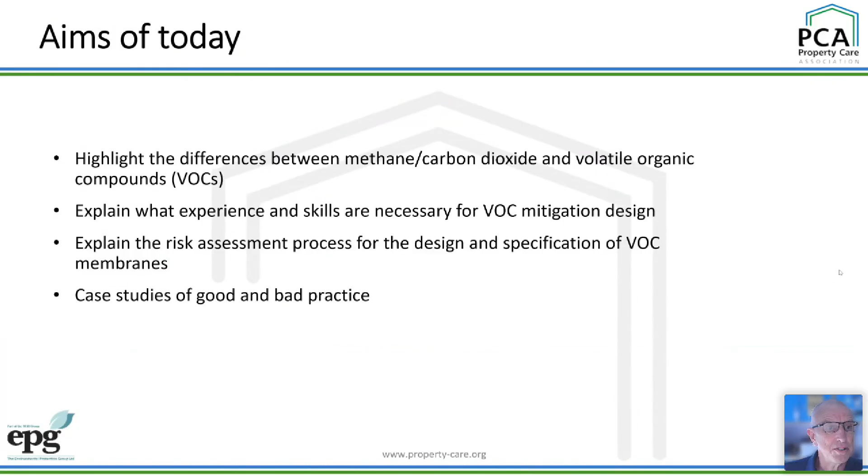So a few years ago, there was Dave Cook's blog on the PCA website, and the inimitable Mr. Cook, when it comes to VOCs, what he was saying is correct. You need to know your limitations, because they are different to methane and carbon dioxide, and they aren't simple things to deal with. Even qualified risk assessment professionals sometimes have difficulty doing VOC risk assessments, and I'll explain some of the reasons why that is during the presentation.

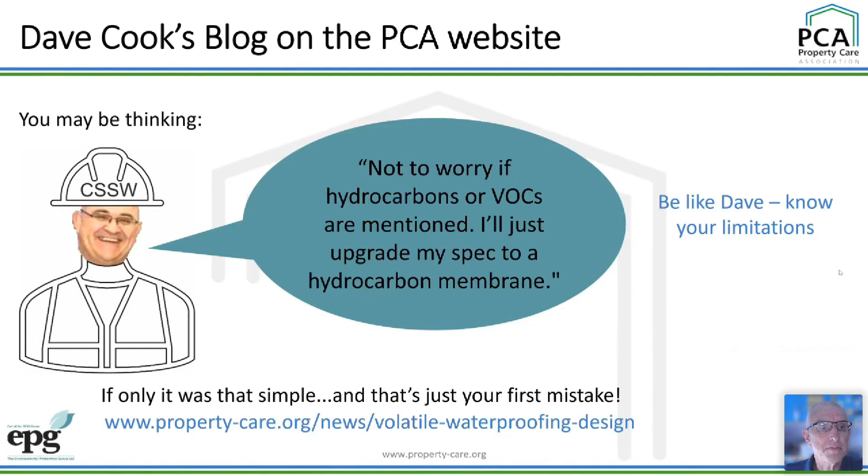So I do see a lack of competence in where waterproofing advisors are providing advice on VOC mitigation systems, and these are some statements that I've seen being made. So the membrane has been tested in line with the 9 standard challenge chemicals. What that's referring to is C748, and then on the basis of those test results, it's summarized as an excellent barrier, and that those 9 challenge chemicals are representative of the performance against all ground conditions with VOC contamination.

That answer just demonstrates poor understanding of VOC membranes and risk assessment. So there are over 10,000 VOCs, and we do not test or risk assess for all of them. Some of them don't even have limits that you can design against, because the toxicologists haven't done the necessary research.

The good thing is that the reviewer is asking for a risk assessment, but the answers are quite worrying, because nowhere in any of the guidance documents does it define or refer to an excellent barrier. And you can't do that, because VOC membranes are permeable to VOCs. They don't stop the flow completely.

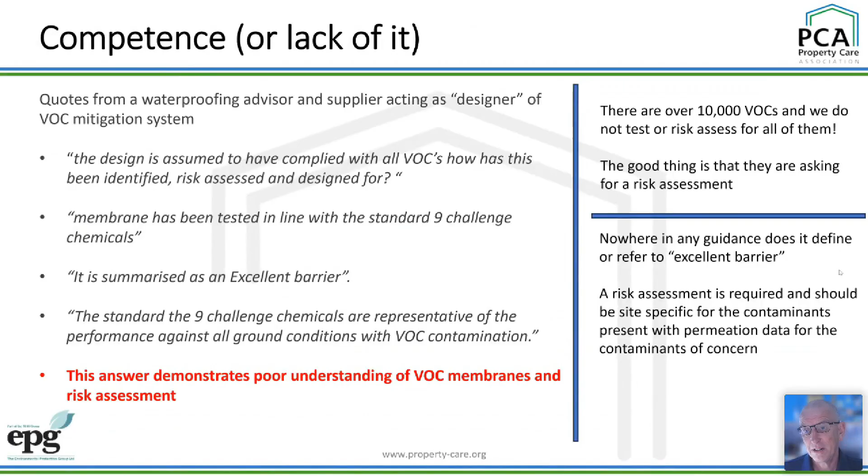So there are significant consequences where if you don't understand the VOC risk and you provide poor advice, then there are consequences. And the first of those is that it can cost clients a lot of money by specifying VOC membranes when they're not required.

But more importantly, people don't recognise high-risk situations and end up specifying inadequate protection that puts the health of occupiers at risk and results in costly remedial works. And that's not just across waterproofing professionals, it also extends into the contaminated land industry as well.

So you can see on the right-hand side there, we're coring through a concrete floor in an occupied building because VOCs are entering that building and building up at concentrations that are unacceptable, that are a hazard to health. And the mitigation design below that slab wasn't sufficient for the concentrations of hydrocarbons or VOCs that were in the ground. That cost, just the investigations to determine what the problem was and then determine a design solution, was expensive.

And then installing the design solution was expensive as well. So it cost the contractor a lot of money. We're talking tens of thousands of pounds to put that right.

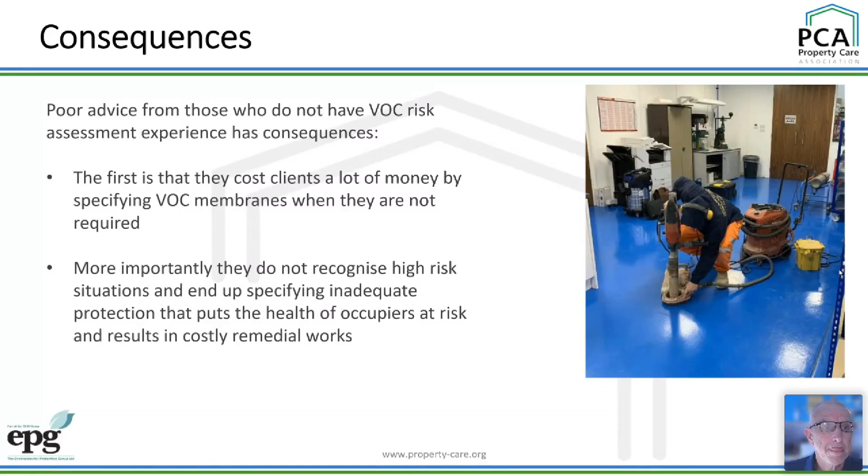So if we go back to the beginning, where do we find VOCs? They're in the ground below old industrial sites, below petrol stations, below dry cleaners, anywhere where petrol, diesel or oil has been stored, either below or above ground. Some of the more common ones are benzene and toluene, present in petrol and diesel, known as petroleum hydrocarbons.

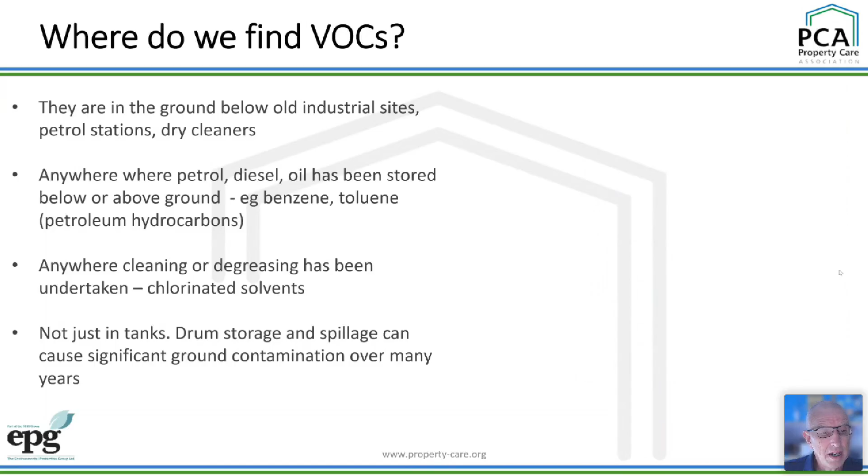But you can also find them anywhere cleaning or degreasing has been undertaken, where you'll commonly find chlorinated solvents. And it's not just in tanks - drum storage and spillage can cause significant ground contamination over many years. You'll quite often see areas like this, particularly in poorly managed older sites.

There was actually quite a famous case where spillage of a chlorinated solvent at a tannery site over the years, when they were transferring it from drums into other containers, had contaminated the groundwater in Cambridgeshire and resulted in quite a costly legal claim against the owners of the site.

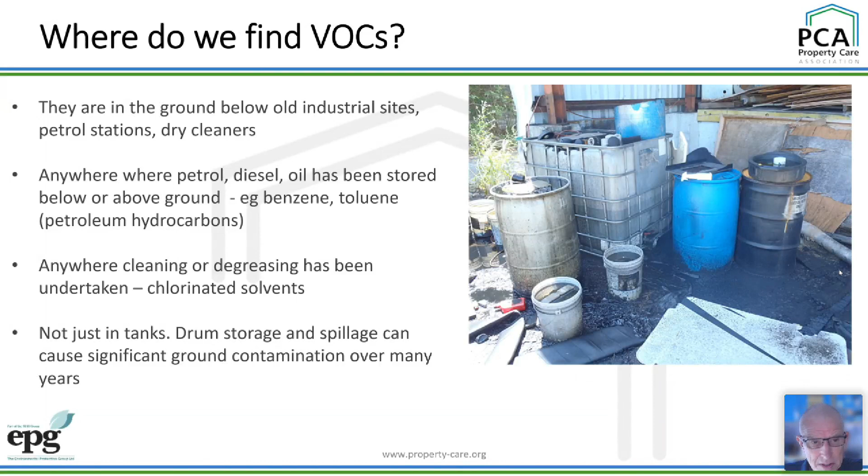So the difference in risk between methane/carbon dioxide and VOCs. On the left-hand side, we've got methane/carbon dioxide, and typically you have hundreds of thousands of milligrams per metre cubed as a source concentration. So methane and carbon dioxide are present in percentage concentrations in the ground.

The migration rate through a gas membrane is actually very low - it's 4 times 10 to the minus 4 milligrams per metre squared per hour. But the target concentration inside the building, even using a minimal risk value of 100 ppm methane, is still very high compared to the rate at which the gas can migrate through the membrane. So on the left-hand side, providing the membrane is installed correctly, it does effectively create a barrier to gas migration. But that's not the case on the right-hand side, where you've got hydrocarbons.

In this case, we have much lower source concentrations of vapour in the ground, but the permeation rate through the membrane is much, much higher. For example, toluene through HDPE has a typical permeation rate of 23,000 milligrams per metre squared per hour, which is high compared to the target concentration of tens of micrograms per metre cubed. A microgram is a part per billion.

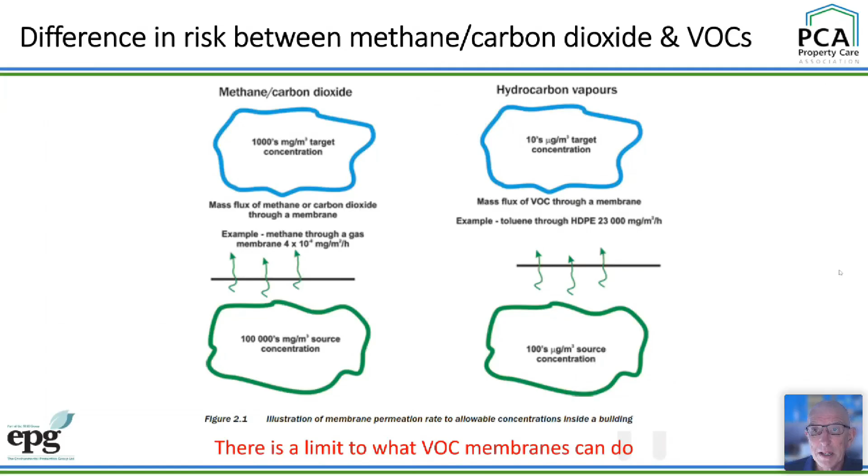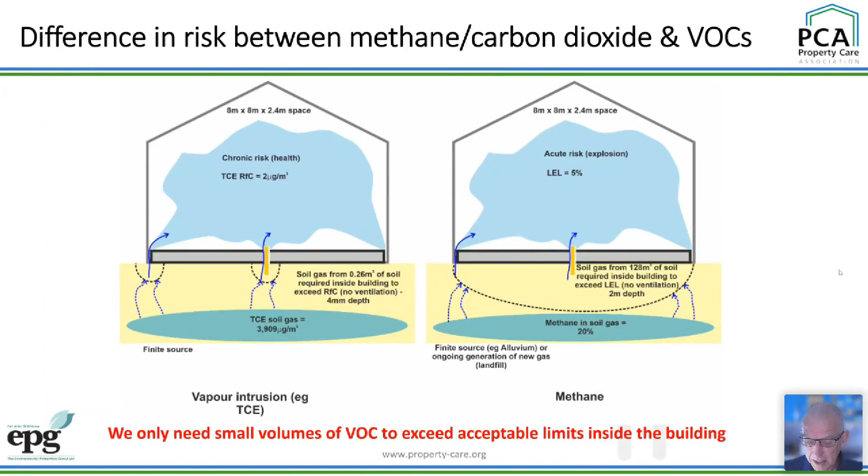The reference concentration, the allowable concentration inside the building, is 2 micrograms per meter cubed. If you've got a particularly dirty site with high soil vapor concentrations, you only need to suck the soil gas out from 0.26 meters cubed of soil, about 4 millimeters depth in that situation. I can't remember what radius I've allowed, but it's very, very small, so it's feasible, and it does happen. That is why VOCs are at much more of a risk than methane and carbon dioxide. You only need small volumes of VOCs to exceed the acceptable limits inside a building.

So, are all hydrocarbons VOCs? No. Hydrocarbons are compounds of hydrogen and carbon joined together, and one of the principal ones are the chief components of petroleum and natural gas. But VOCs are any organic chemical compound that can significantly vaporize under conditions of normal atmospheric temperature and pressure. So hydrocarbons, for example, include oil. And oil on its own is not a VOC. There might be VOCs within it, but it's predominantly heavy end hydrocarbons, which don't volatilize.

So in simple terms, that means it's compounds that are likely to change into gases. Compared to compounds like water, they evaporate with far greater ease, which means they can quickly contaminate indoor air. If they're present in water, they can diffuse through concrete and into basements. There are various limits that people apply to define what a VOC is. In BS 8576, it's a liquid at 20 degrees C with a boiling point less than 180 degrees C. An EU definition is that it's got a vapor pressure less than 0.01 kPa. But ultimately, it means they produce gases or vapors at normal temperature and pressure.

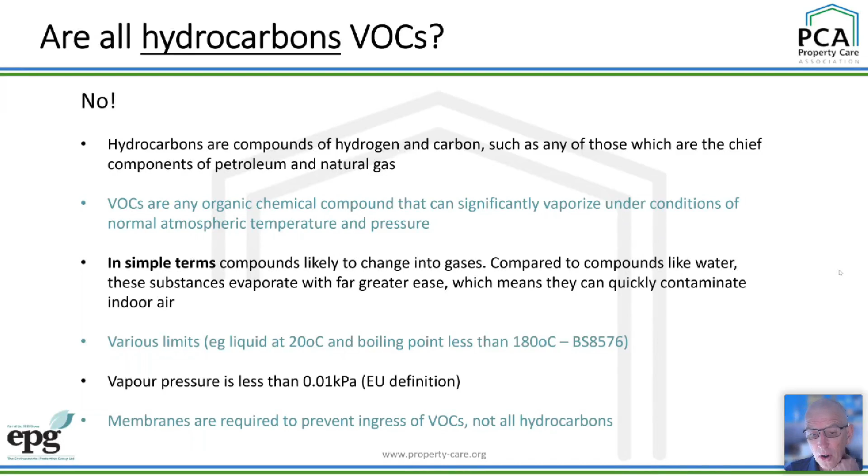So membranes or any VOC protection system are required to prevent ingress of VOCs, but not all hydrocarbons. There are many hydrocarbons that aren't volatile. In chemistry terms, if you look on the right-hand side, that's a molecular diagram of benzene. It's got 6 carbon atoms joined together in a ring, and each carbon atom has a hydrogen atom attached to it. Because it's got 6 carbon atoms, we refer to that as the carbon chain length.

So hydrocarbons with carbon chain lengths greater than 16 are not volatile. You can see on that table on the right hand side, things like petroleum, jet fuel, kerosene are predominantly less than C16, so they will volatilize very easily, and the individual compounds within them will volatilize. Diesel sits mid-range—some of it will volatilize, other parts won't. And if you look at motor oil, there aren't any VOCs in motor oil.

So only contaminants that are sufficiently volatile pose a vapor intrusion risk. In simple terms, the blacker and stickier the material is, the less likely it is to be volatile. One of the important things is that most polycyclic aromatic hydrocarbons, referred to as PAHs, are not volatile. We quite frequently see references to PAH with recommendations that it needs a hydrocarbon membrane, but in the vast majority of cases, it won't. There are a couple, such as naphthalene, that are volatile to an extent, but it's rare that that is a risk driver on a site.

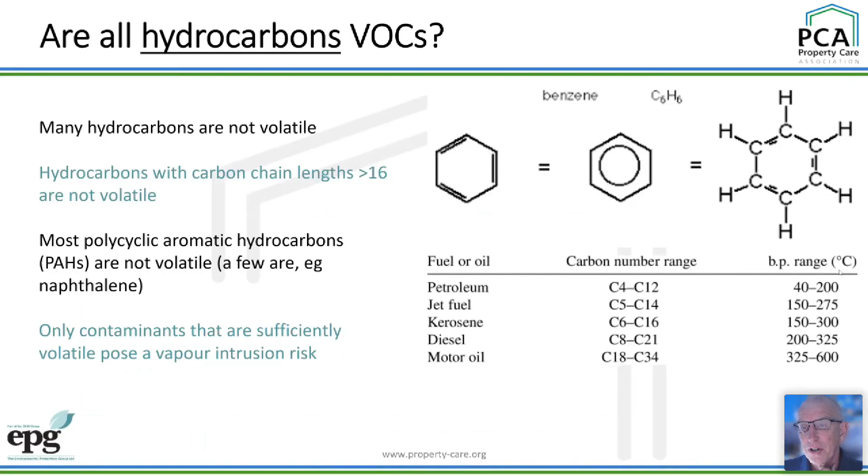So just before we go on with more detail about VOCs, you do need to think about other compounds and gases that have similar issues. There are semi-volatile organic compounds, which include some pesticides, some plasticizers, some fire retardants that can be contaminants in the ground that you might have to look at in terms of providing protection against.

Elemental mercury is a particularly nasty material if it gets below a building or is present on a site, because the allowable concentration is 30 nanograms. I don't know what that is in terms of parts per, but it's extremely small. We had to look at a site to remediate contamination simply from somebody dropping a barometer and breaking the mercury inside. It went through the wooden floorboards below a house and soaked into the soil. It took us a long time.

We excavated a lot of the soil and removed it, but even then, there was still residual mercury. You can see on the right-hand side that's the gas monitoring we did. At the bottom, you can see the mercury vapor and the way it's influenced by the heating system—when there's a fan on and fan off. It took us a lot of work to make sure that was safe for people to live in.

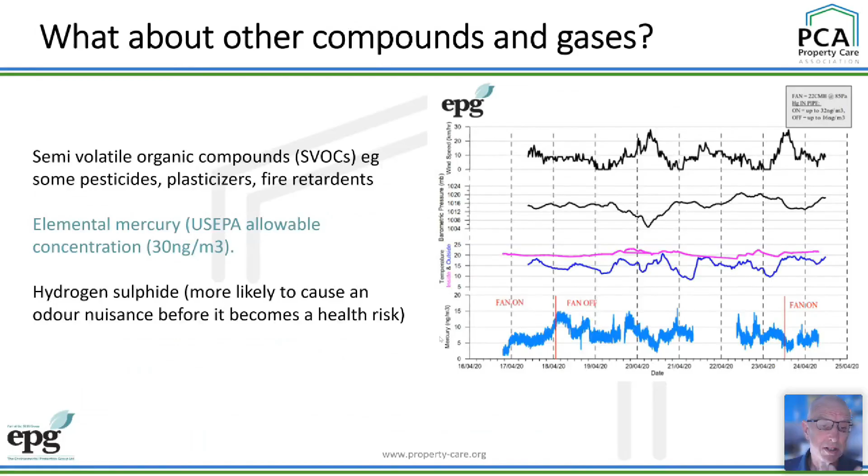So on to VOC membrane design, and I think it's important to differentiate between design and detailing. I've got a degree in civil and structural engineering, and I have done structural design work in the dim and distant past, so I compare it to structural steelwork. The design of structural steelwork is the structural analysis and specification of the steel beams and columns, and detailing is drawing up all the connection details onto drawings so that somebody can construct it. So comparable sort of things in VOC design.

The VOC design is the risk assessment process to determine the required properties of the membrane and what other elements of protection are necessary. Detailing is the drawing of site and building specific details to incorporate the membrane into the basement construction. It's important to make clear that supplier standard details are not adequate, as in not sufficient for a detailed design. They can inform a detailed design, but they are not the detailed design.

And the construction process must be considered. So can the line that you are putting on the drawing be installed within the construction process for the structure? And when does it need to be installed?

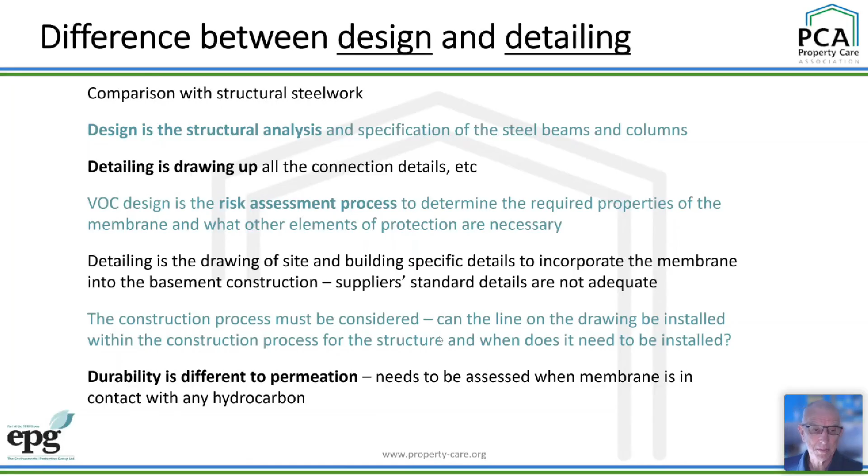And durability, another important consideration, is different to permeation when you're looking at membranes. Durability needs to be assessed when the membrane is in contact with any hydrocarbon, not just VOCs, because the hydrocarbons can attack the membrane material. So that's an important thing when you come to membranes that are below the water table, where they're in contact with the contaminants.

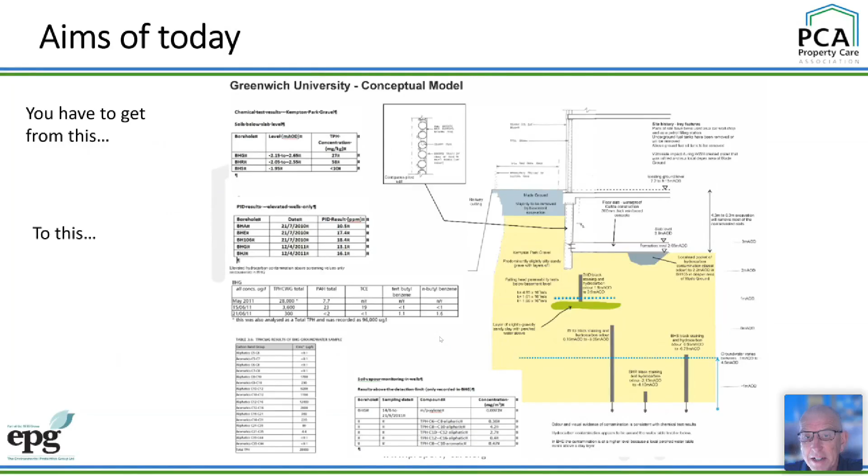So to do a VOC risk assessment, that requires modelling. You've got to model how fast the VOCs are going to get into that basement, so you've then got to simplify that into something that you can analyse, something like this. You need another diagram to explain which equations you are using to analyse the different parts of the process. So you've got the source of the hydrocarbon vapor, you've then got to calculate how that source transfers into a soil vapor concentration, how fast it moves through the soil, through the concrete, and then the dilution inside the building. So it's quite a complicated process, and there are different equations for different situations. You've really got to draw a conceptual model for the calculations as well.

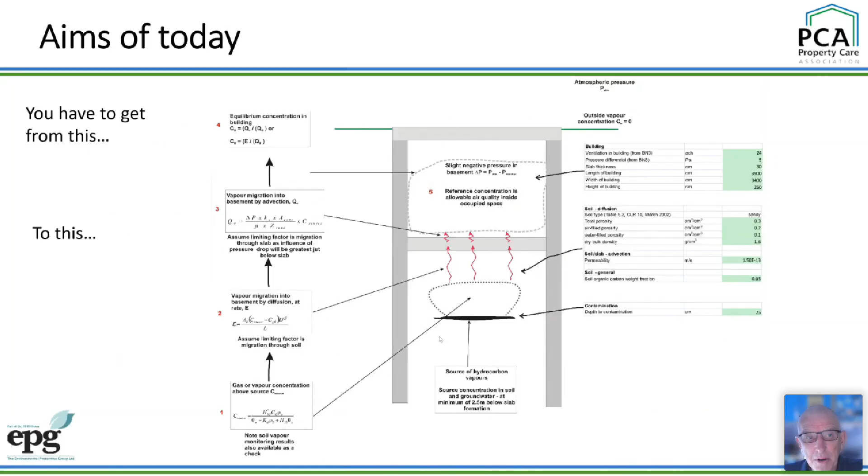So the design of a VOC membrane should extend the risk assessment that has been done originally that says there is a risk, to show that the mitigation that is proposed reduces that risk to an acceptable level. And it uses models or equations to estimate permeation into the building, as I've just shown you.

But it's not just putting numbers into equations. Doing the sums is the easy bit. I could do the sums in 2 minutes. Just bung everything into a spreadsheet, job done. The time and effort is in making sure that you put the right numbers into the right equations.

And all models are wrong, but sometimes some are useful. The numbers are there to help you make a judgment on whether it's acceptable. They are not the answer in themselves. And that is a fundamental principle of risk assessment.

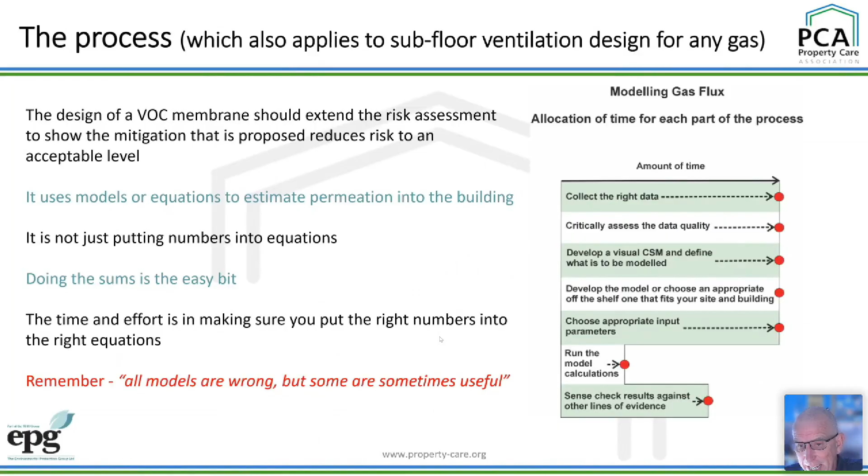The other thing is that a cocktail of contaminants might be present. So there are unusual ones that you will frequently come across in actual fact that aren't in CIRIA C748. So trimethylbenzene is a common one on sites, and cis-1,2-DCE is also common, but they're not listed in C748.

So you might have to ask a membrane supplier to give you the data for those materials, or you might have to actually spend some money as a designer, depending on how far in advance of construction you are, and get some materials and test it yourself.

You also need to consider the combined effects. So we'd run the calculations for individual compounds, but there are synergistic effects. So benzene on its own will have a lower risk than if you combine benzene with the risk from other compounds.

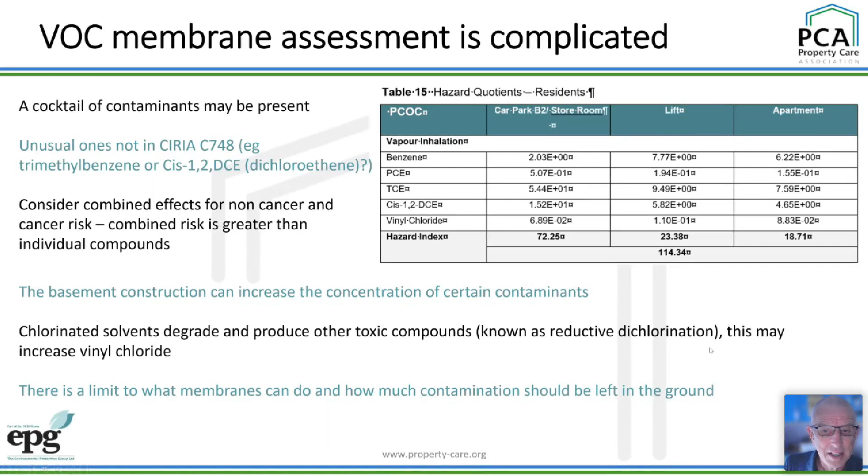And there's a limit to what membranes can do and how much can be left in the ground. It's worrying that people in the contaminated land world are saying that they're going to break the vapor intrusion pathway, break the ingress into the building, and then they can leave as much dirt in the ground as they want to, and that is not an acceptable approach.

So which model for basements? It depends where the groundwater is and what your building construction is. So the right hand side, figure 4.7 from NHBC Foundation NF94, hazardous ground gas, an essential guide for house builders.

This was written for methane and carbon dioxide essentially, but the same principles apply to VOCs. If the basement is below groundwater, the model will need to assess dissolved phase diffusion towards and through the membrane and any other construction that is there. And if it's in contact with dissolved phase contaminants, that can increase the diffusion rates through a membrane by a factor of 2. So you need test data where the VOC permeation rate is being measured when the membrane is in contact with a liquid, not when it's been in contact with a vapour.

You also need to consider whether light non-aqueous phase liquids or dense non-aqueous phase liquids are present. What that means is the actual hydrocarbon itself is there as a discrete layer, either on top of the water when it's light, so less dense than water and floats on the surface, or denser than water when it sinks to the bottom. For example, it will sink through gravel, and then if it comes up against a clay layer, it will sit in depressions in the clay layer. But that increases the risk of vapor intrusion significantly, and it's also a durability risk if it's in contact with the membranes.

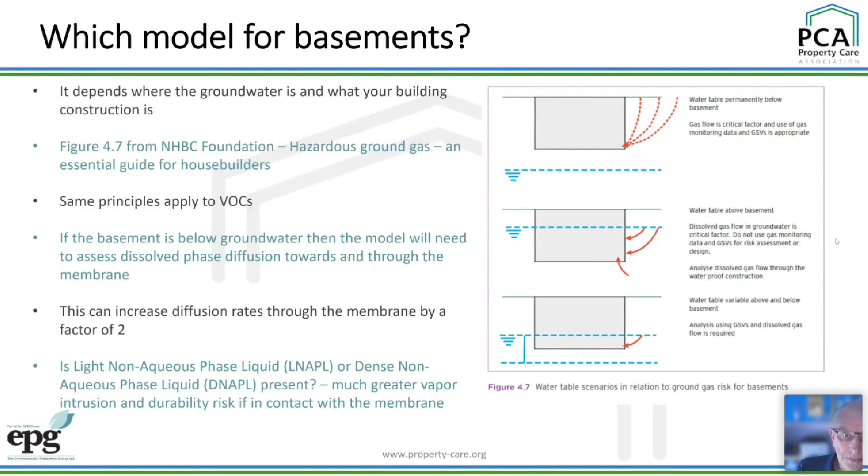If the water table is above the basement, then you obviously haven't got vapor phase flow, you haven't got gas flow. So you need to look at diffusion from the groundwater into the basement construction. And if it's a variable water table, then you've got to do both and see which gives you the worst answer. And if you use the wrong model, it can have significant implications.

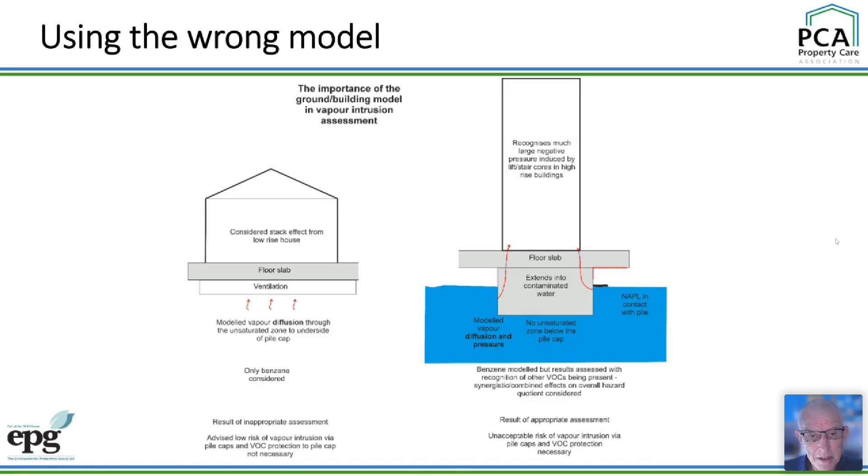And so they effectively were telling the client that it didn't need VOC protection, but on the basis of a completely inappropriate model.

So when do you need a VOC membrane? The decision's based on risk assessment. As I said, you don't need a VOC membrane if there are only non-volatile hydrocarbons present that aren't in contact with the membrane.

Some petroleum hydrocarbons may be present, but they biodegrade within the unsaturated zone. So if you've got a significant unsaturated zone that's oxygenated below the slab, then if it's petroleum hydrocarbons only, there may not actually be any risk. The real risk is with chlorinated solvents, because that doesn't apply to them. They don't biodegrade in that unsaturated zone.

So if you're putting a basement in, what you need to be sure of is that by installing the basement, you don't reduce oxygen ingress. So you might see an unsaturated zone during the site investigation, an oxygenated zone in the gas monitoring. But when you install the basement, it stops oxygen flowing through the surface, reducing that potential and reducing the factor of safety.

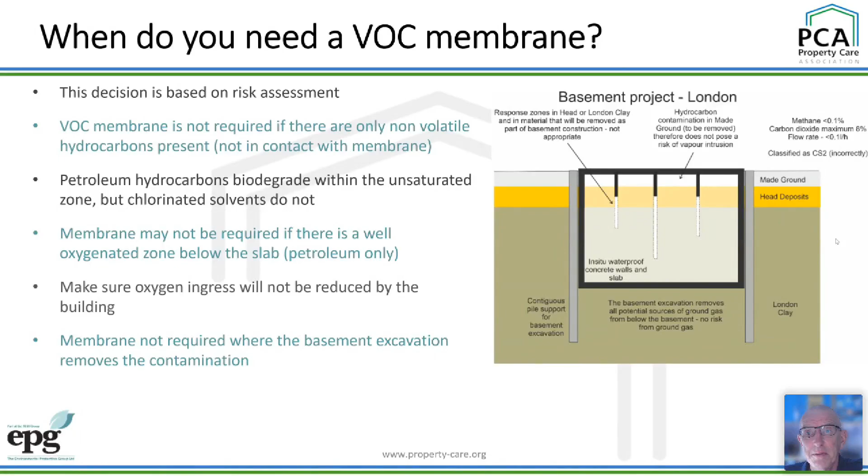Membrane properties are key to the design, particularly the permeation rates of different VOCs through different membranes. It's important that you interrogate manufacturers' or suppliers' specifications, because we've had issues on jobs we've looked at with data sheets, and this includes our clients that we do a lot of work for. We've seen incorrect conversion of units from lab test reports onto data sheets, and materials tested that don't achieve breakthrough of the VOCs.

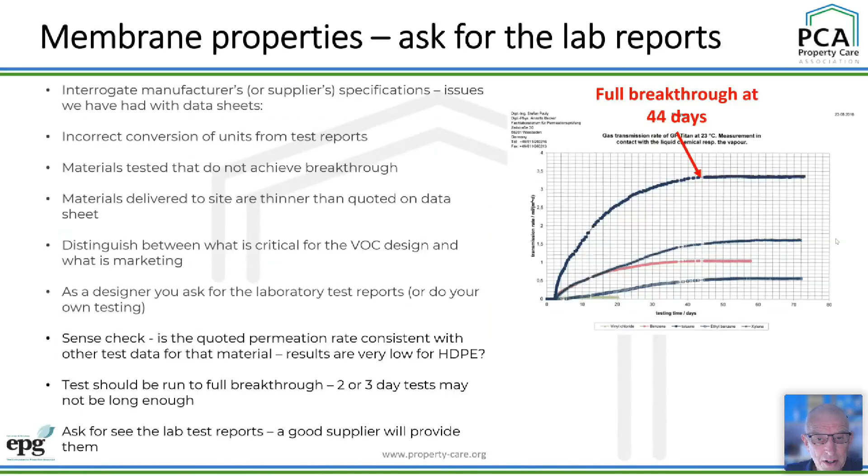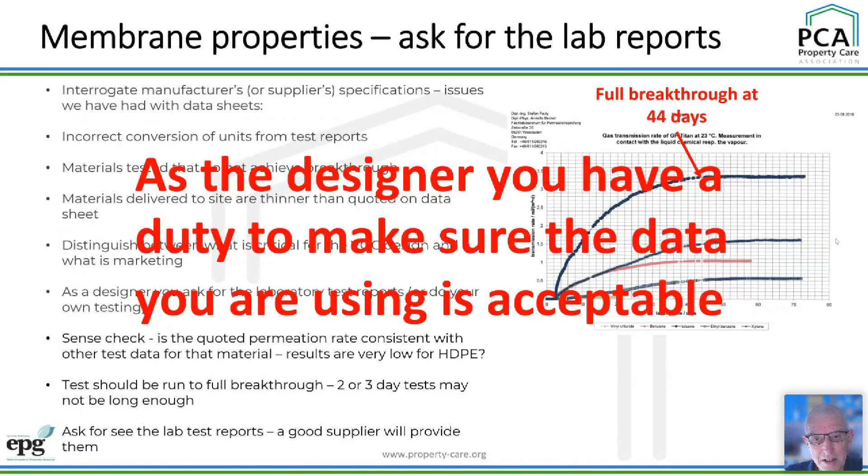Importantly, as the designer, you have a duty to make sure that the data you are using is acceptable and representative. I was at a conference last year when I asked a lawyer about this, and he said, absolutely, that is the case. If you don't do that, then you could be open to liability and claims.

So the top set of results on the right-hand side, again, are a data sheet from a BBA certificate for a product. That doesn't mean because it's got a BBA certificate, it will work on your site. You need to check, and it says in the BBA certificate that you need to check that the product will actually work where you want to put it.

Now we've seen these test results. It's for GP Titan Flex. We've got the test lab reports, and we know their correct values on the sheet. But I've also seen a data sheet that just replicates those numbers and puts a less than sign in front of them for another membrane.

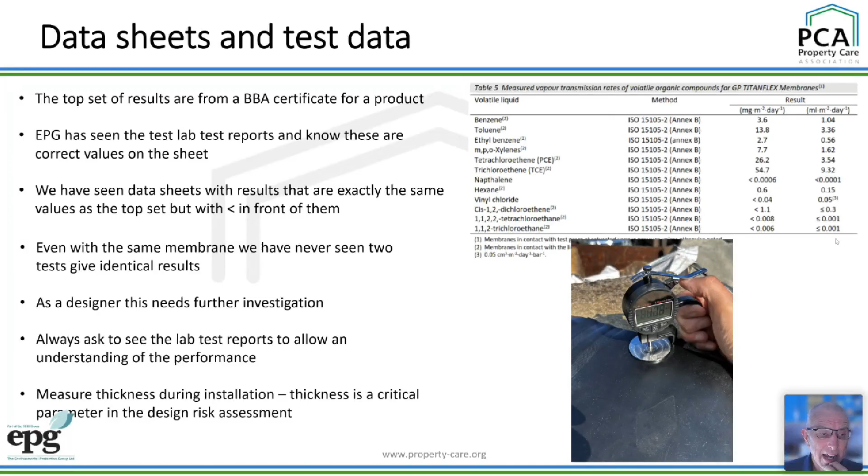Even with the same membrane results, I have never seen two tests give identical results. So it may be that it's been tested and all results are less than what's on this sheet, but you need to ask the question and make sure it has the permeation rates being claimed.

So finally, when is a VOC membrane not enough? You'd be surprised how many cases that applies. This is one example where localized areas of LNAPL, the non-aqueous phase liquids, are present outside a basement, and the risk assessment showed a high risk associated with vapor intrusion. We had to consider vapor intrusion via various pathways through the water, through the unsaturated zone if the water level dropped, through the concrete, the diaphragm wall, and the waterproof concrete liner wall.

We also had to consider the lift pits as a high risk area because they carry VOCs to higher levels in the building. In the end, on that site, mitigation comprised a waterproof concrete basement structure with specific water bars to address the VOC issues.

We then had a VOC membrane which was pre-applied and welded, but because of the presence of the NAPL and the high concentrations of VOCs in the water, we provided an additional activated bentonite membrane, a GCL, where the bentonite's been modified to adsorb VOCs or hydrocarbons. This was to minimise exposure of the main VOC membrane and minimise any risk of durability problems due to the extent of contamination in the ground.

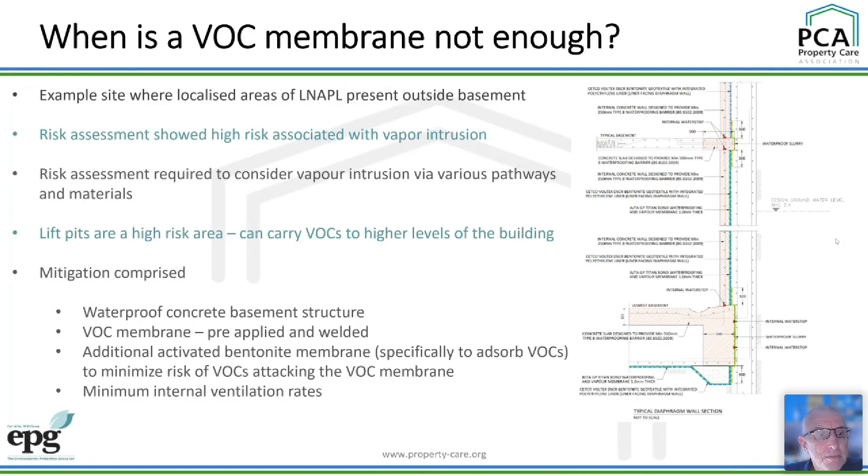Drained cavities and VOCs are another issue with waterproofing - drained cavities allow dissolved phase VOCs into the building envelope. You've got to look at what the concentrations are and what the consequences are of allowing VOCs to drain into the cavities.

In some cases that will require a suitable membrane between the cavity drain and the occupied space, again based on quantitative risk assessment and permeation rates through the cavity drain material and any membrane provided. Other considerations are that if you've got contaminated water coming into that system, you can't discharge that water to sewers or soakaways.

The same applies to external drains. If part of your waterproofing system is an external drainage system, and you are allowed to discharge it, you actually need a permit from the Water Authority, which is explained in CIRIA C795. Any discharge without a permit is illegal.

You need to consider whether the external drain or cavity drain is durable when exposed to those VOCs and other contaminants. Think about things like risk to workers during maintenance of pumps - do you need intrinsically safe pumps? Are the VOCs present at concentrations that can create an explosive atmosphere?

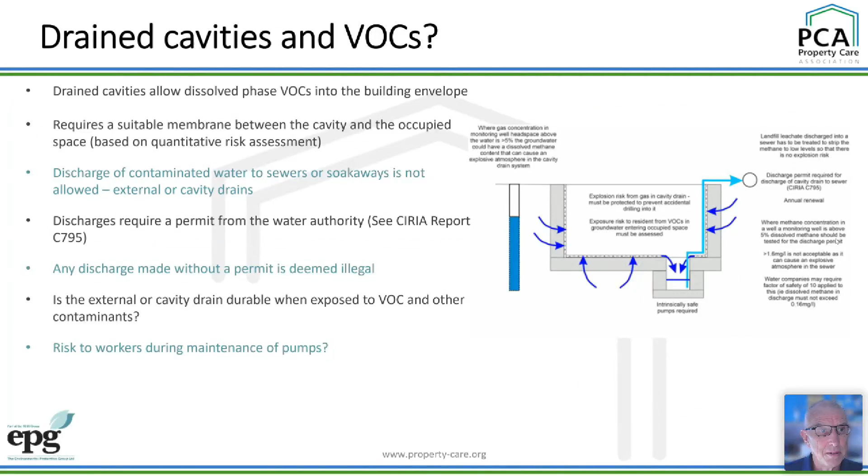So take-home points: VOCs are different to methane and carbon dioxide. You should not rely on membranes alone to provide mitigation in high-risk scenarios. Not all hydrocarbons are VOCs, so don't all require a VOC membrane. The design process for VOC membranes and other measures requires vapour intrusion risk assessment skills. The design should extend the base risk assessment to show that the mitigation is sufficient.

Detailing of the actual system into the construction is different to design. And the risk assessment is not just putting numbers into equations - it needs the right numbers in the right equations and a thorough understanding of contaminated risk assessment.

And finally, none of this is new. It's all within CIRIA C748, which was published back in 2014, so over 10 years ago now.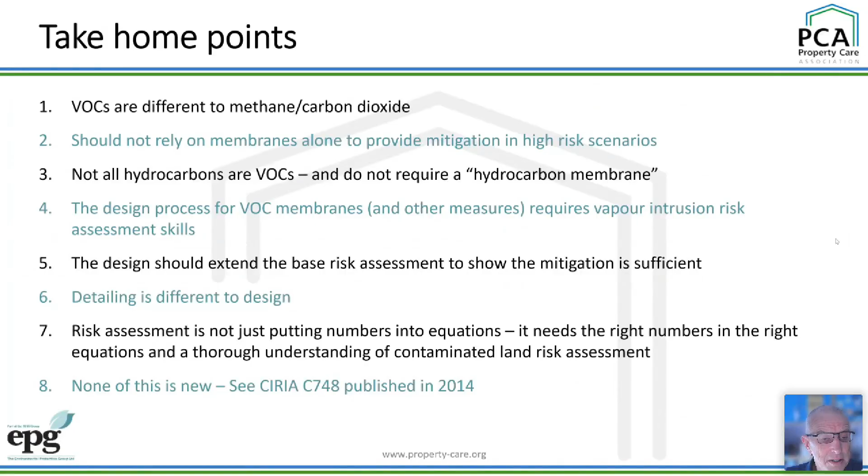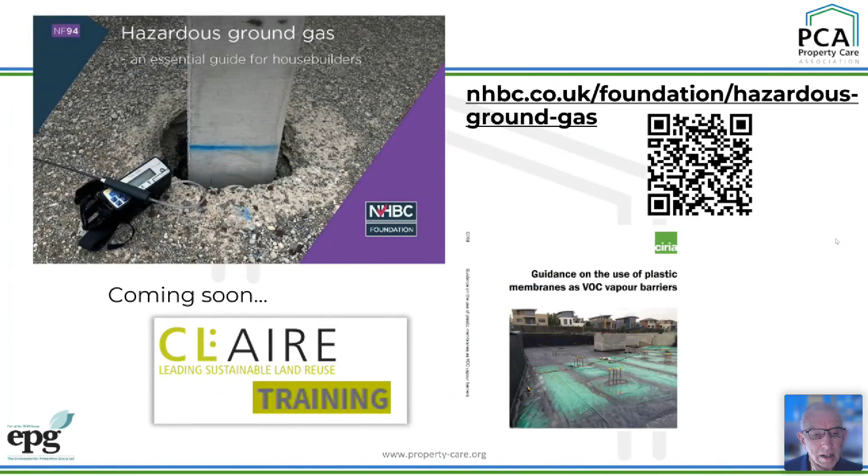So there are just a couple of the references. The NF94 hazardous ground gas guidance has a lot of useful information for methane and carbon dioxide, but also for VOCs, and the CIRIA report C748. There's also information on the CL:AIRE website as well.